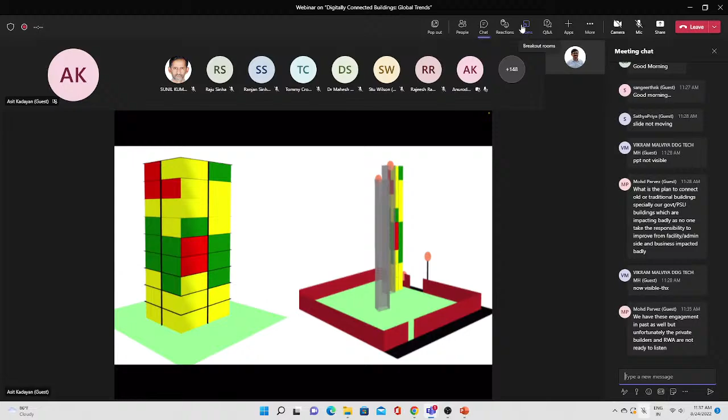If you evaluate, as a regulator or as a licensor, what is the quality of experience, one will average out the experience. Even then, one may not measure all the variations which are happening in reality. And if you average out and declare that it is a yellow zone, red zone, or green zone, it is not a true representative of the situation.

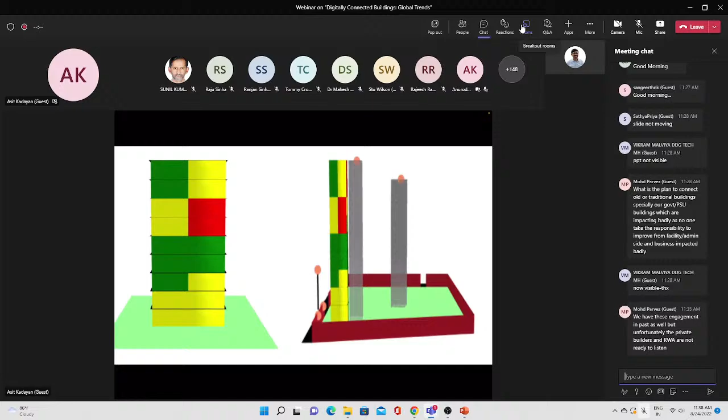Why is it so? A person living in a particular apartment in a red zone is always in the red zone. His experience cannot be averaged out by the green zone apartment. So a green zone apartment and a red zone apartment should not be averaged out and declared that this area is good.

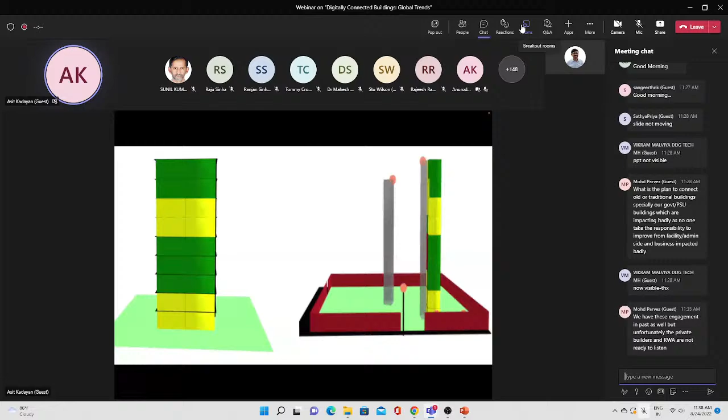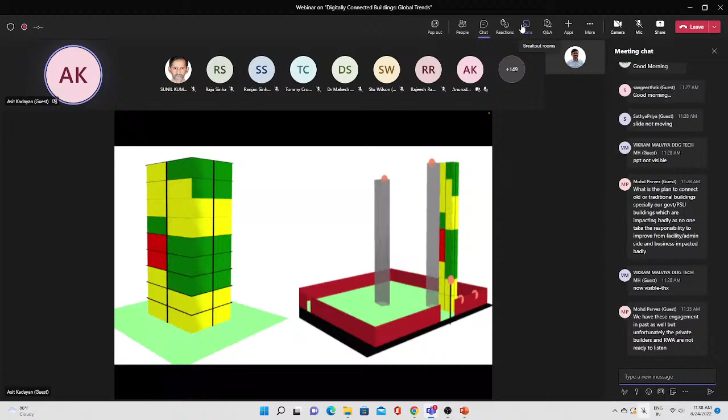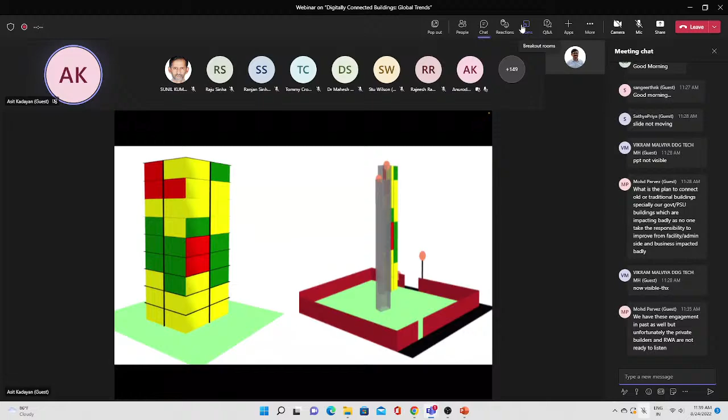So you need a micro level assessment. It is heavy stuff, difficult to do in practice, but there are ways it can be done, who should do it, and how it will be advantageous to resolve the issues. So it is important to rethink and reimagine how the evaluation should be done and how the resolutions or remedies can be done for the problems which come out from the evaluation.

This diagram is of an apartment, from a Mumbai multi-story apartment, a premium luxury apartment area. There are 3 apartments on one floor. This shade defines the 3 apartments. The red area, yellow area, and green area depend on how many antennas you have planted and where you have planted them. On that basis, the quality of experience will differ.

You can see that even if you have placed multiple antennas on the same floor, it is not entirely green. Still there are some red zones. So if you want a gold standard where everywhere is green, you have to evaluate at the design level and then ensure it is gold standard. And if you want to compromise on cost, there will be some places where quality will be bad, and you have to accept it because there is no way around it.

So whatever is acceptable should be presented to the users and final users of that building. This diagram presents that you should have a view at the time of construction or design of the building, whether there will be a good quality of experience or not.

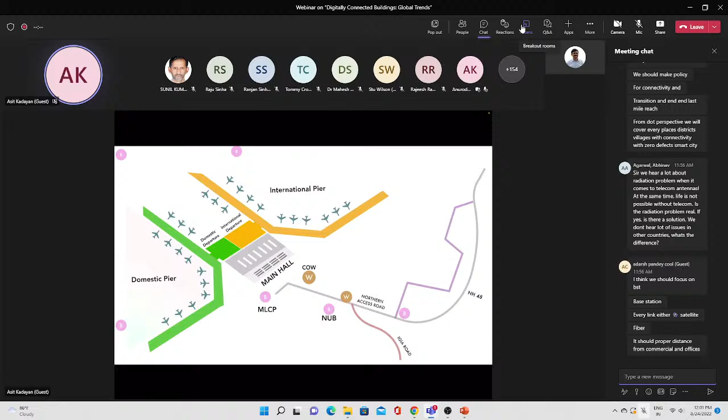There is already a report on that in the public domain. This is an example: if you want to build good connectivity in hilly areas, the situation may be similar in mountains or hilly areas. If road or railway authorities are not ready to co-design or co-build the digital infrastructure, there is no possibility. Telco people won't get electricity or permission to install towers because it is forest land, or there is no backhaul connectivity.

But if railway or road authorities collaborate and design at the time of construction or upgradation of the road, then it is not that difficult a problem. So the requirement is that the need of the hour is to change the approach, and there is no one size which fits all. There may be variation for row houses, malls, or complex buildings.

As we discussed, it is a principal agent problem, information asymmetries are there, and preferences are not time consistent. Initially, people do not give due weightage to digital connectivity. At a later stage, they expect that there should be good digital connectivity. Even if builders have taken initiative to provide good digital connectivity, we have seen that it has converted into a monopoly, so the market is not functioning.

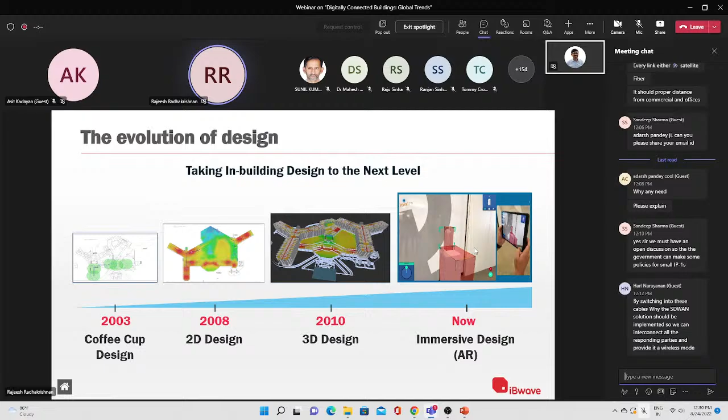Now I'd like to touch on the key features of 5G: beamforming and massive MIMO. In traditional wireless systems, one antenna was used at the transmitter end and another at the receiver end. The evolution of technology allowed the use of multiple antennas at the transmitter and receiver ends to improve spectral efficiency of the wireless communication system. This is well known as MIMO. The number of antenna elements usually depends on the number of spatial layers or streams, for example 4x4 MIMO and 8x8 MIMO.

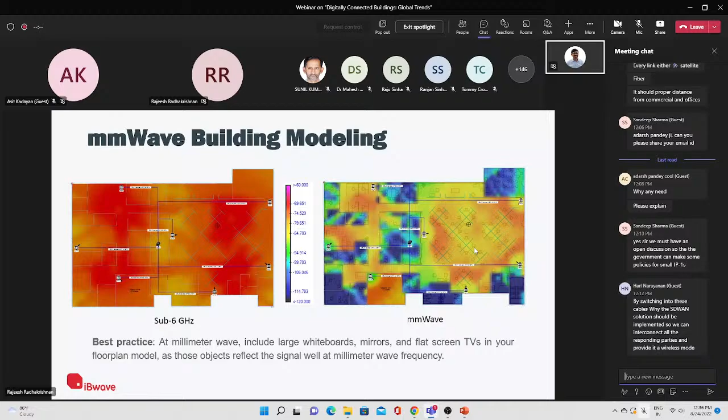One more thing is the near and far field boundary. When making an in-building design or deployment, we need to take care of this. We have to avoid any absorbing materials or reflective objects near the antenna, and maintain a buffer distance of minimum 2 meters from the antenna for all far field boundaries. This is a common practical issue in shopping malls, lobbies, and hospitals, where sometimes they put an antenna just above the ceiling, and that ceiling might be a metal ceiling, which will reflect or absorb the signals. We need to avoid this, especially in 5G, because it is at 26 gigahertz.

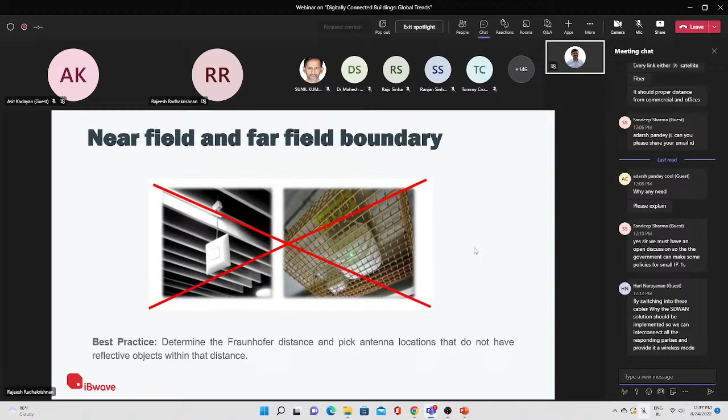Then I would like to share some sample designs. For that, I need to switch my screen. Give me a second.

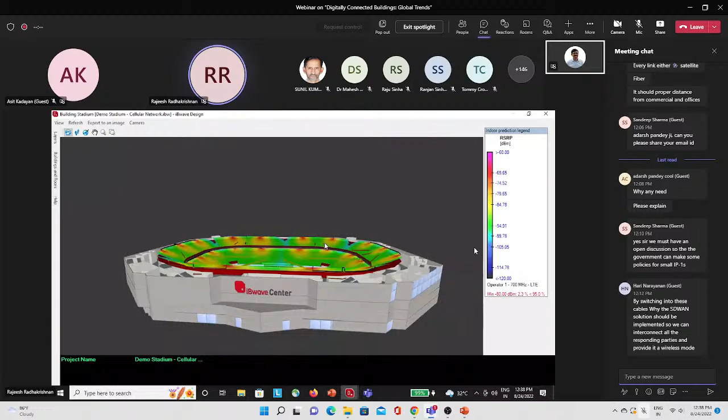So this is a stadium design, placed with many antennas. This is an LTE design basically, and we designed multiple technologies in this stadium. I will quickly show the 3D building. By using the floor plan or the drawing, we can create the 3D model of the stadium, and we are simulating it. You can see the legend on the right side. We can simulate the signals of each layer, including the inclined surface of the stadium.

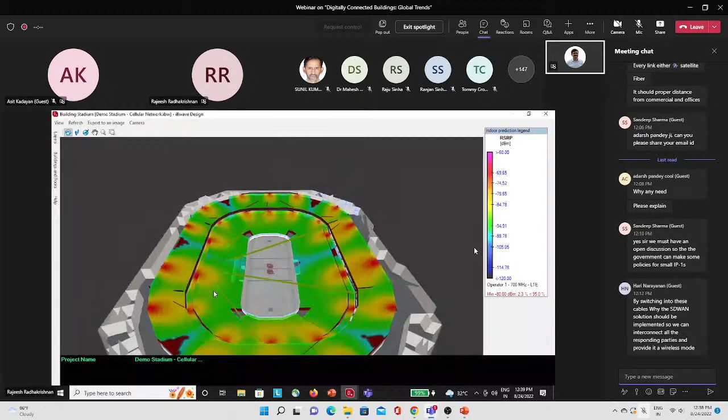In IBwave we have many rich features. We have the complete 35,000 components on the left side, and we have the reports here. Once you make a design, with one click you get the complete bill of material with the cost. From the cost estimation, we can separate what is the cost per square feet. This will help real estate, as I referred in the first presentation, understand what the cost would be if they enable the building to be completely digital with wireless technologies, and what could be the cost per square foot at the design level itself.

So the other design which I have is an enterprise building.

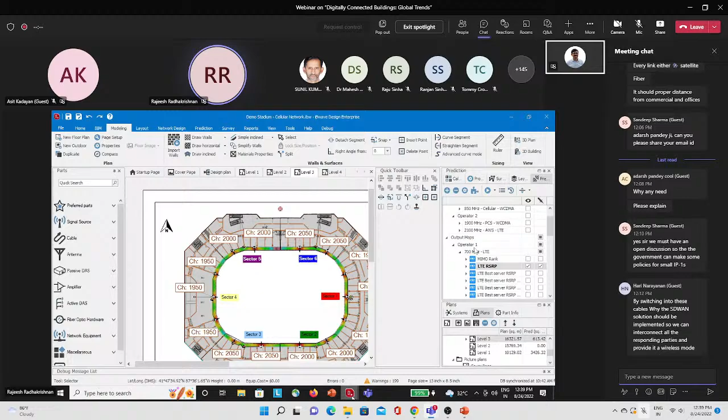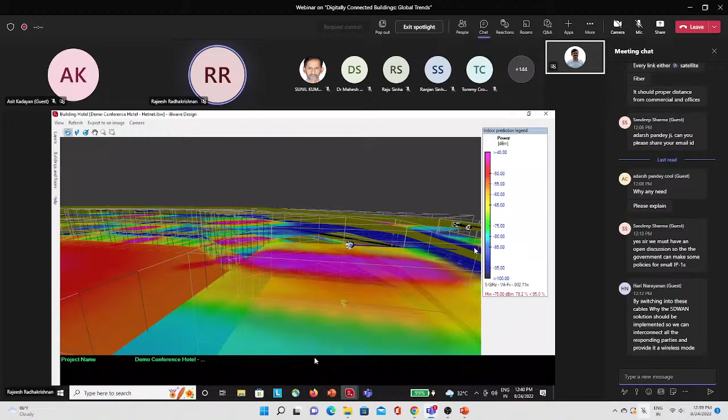It's a combination of Wi-Fi as well as DAS building. So you can go inside the building and see the antenna and what is the coverage, and also the cable connectivity.

See here, one antenna they put in the lobby area, and what is the coverage here. So we have vertical, horizontal, and inclined prediction capability.

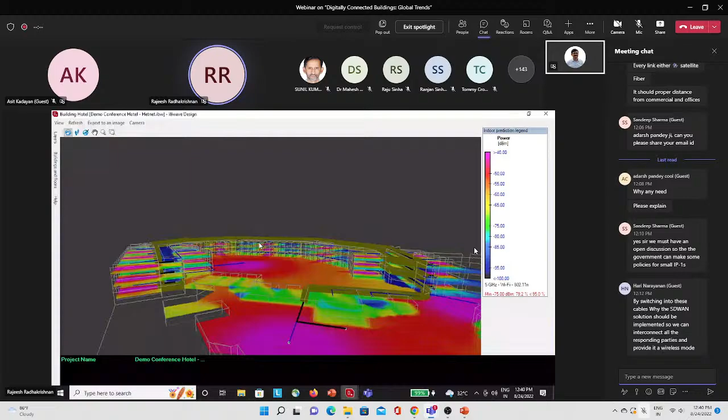If any changes happen in the deployment, they can change that from the field itself, and the software will be updated automatically and run the prediction. For example, if somebody wants to put an antenna in one location, the building owner might not allow it - it might be related to their aesthetic view, something else. So he can change the antenna location in the software itself from the field, and the software will run automatically and give the result of the prediction with respect to the changed location.

Then it goes to the validation team. They can take that same file, go to the field, and check the coverage, and cross validate what is predicted with what they are now getting. And if there is any delta at a particular point, the tool will show there is a delta of 3 dB or 5 dB at that point, so they can do root cause analysis. All this exchange between data and storage of the data is done by IBWave Unity.